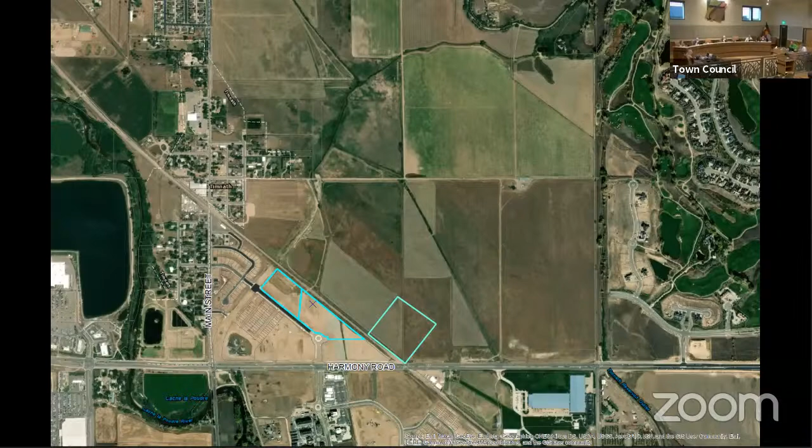The areas are currently zoned RMU and R2, and this is an amendment to their existing PD overlay. Currently they're depicted as the MUTH area, just north of the roundabout, and the R2 alley load area, just northeast of the railroad tracks.

The major changes to this area: they're requesting to reduce the lot sizes from 1,800 square feet to 1,200 square feet, reduce the lot width from 20 feet to 17 feet, reduce the lot frontage from 18 feet to 17 feet, and reduce the front yard utility easement from 14 feet to 8 feet.

The changes to the R2 alley load area would reduce the lot sizes from 5,750 square feet to 3,500 square feet, reduce the lot width from 50 to 40 feet, reduce the lot frontage from 35 feet to 30 feet, increase the maximum impervious lot coverage from 50% to 75%, and reduce the side yard setbacks from 7 to 5.

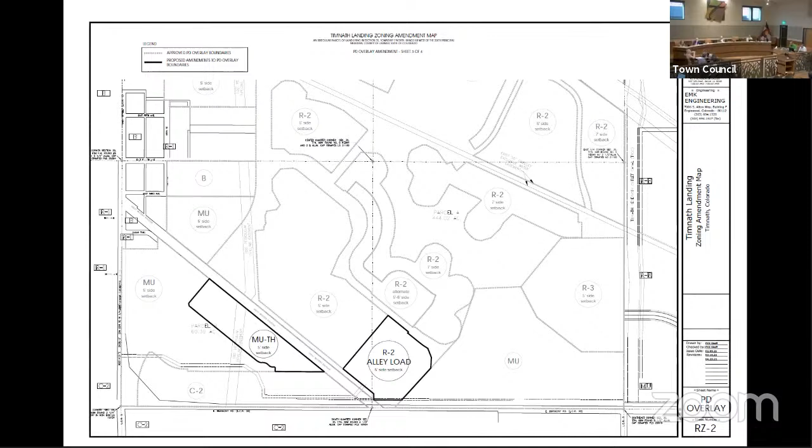These changes are being requested to provide more pedestrian-friendly development, with front porches and yards being the prominent visual from the streets while garages are in the backs of homes. These two amendments are strictly for these two areas; it does not apply to the rest of the Timnath Landing subdivision.

This is an example of the product type they would be providing, a high-level concept showing generally where the alleys would be, where some parking for garages and parallel parking would be located, and the fronts of homes fronting open space or the street directly.

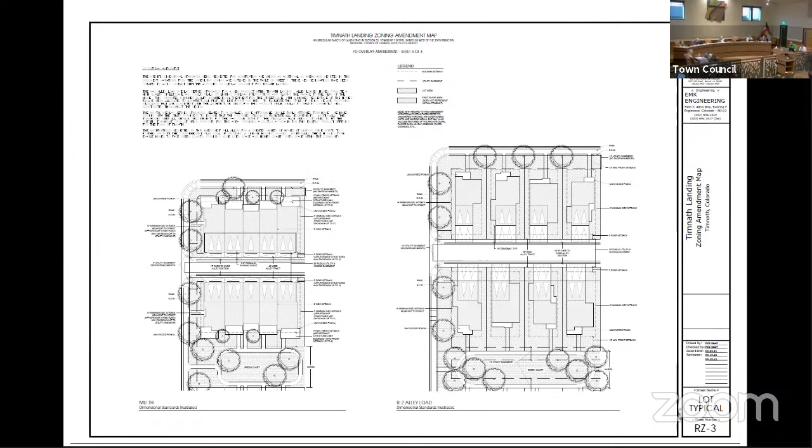Moving into the preliminary plat amendment: this map shows the overall preliminary plat amendment to create 125 single-family attached fee simple lots. The single-family attached lots will range from roughly 1,300 square feet to 3,500 square feet. These lots were reviewed against the R3 dimensional standards per the land use code for lots in the RMU zoning district, and against the amended PD overlay before you tonight.

The density for this area will be roughly 12 units per acre. This development is also providing 22% open space, park area, and trail connections. That meets what was the previous code, since this submittal was submitted prior to our recent open space amendment to the land use codes, so it was reviewed off that code, meeting the 20% open space requirement at that time, and they are providing 22% with this development.

A neighborhood meeting was held for this proposal on April 12th to gather feedback. No residents attended, since there are really no residents in Timnath Landing, so an observation report was not generated. Staff has reviewed this application in conformance with the land use code and the proposed PD overlay and finds it to be in conformance.

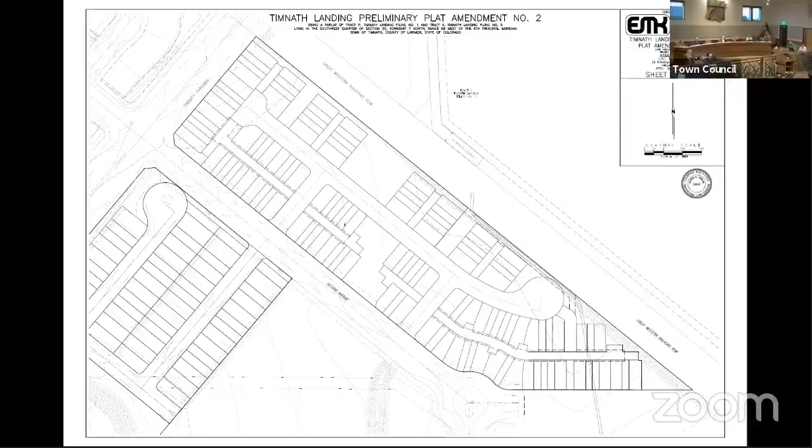First off, thanks for taking time out of your evening to hear about the Timnath Lakes PD amendment and preliminary plat, and upcoming minor subdivision as well.

John Prestwich with PCS Group, Denver, 200 Kalamath Street, Denver, Colorado, 80223. We're the land planners and landscape architects for the Timnath Lakes community.

I always want to take a quick moment to thank Kevin and staff for helping us get to where we are tonight, and also acknowledge all of our team members who have helped with the creation of this community.

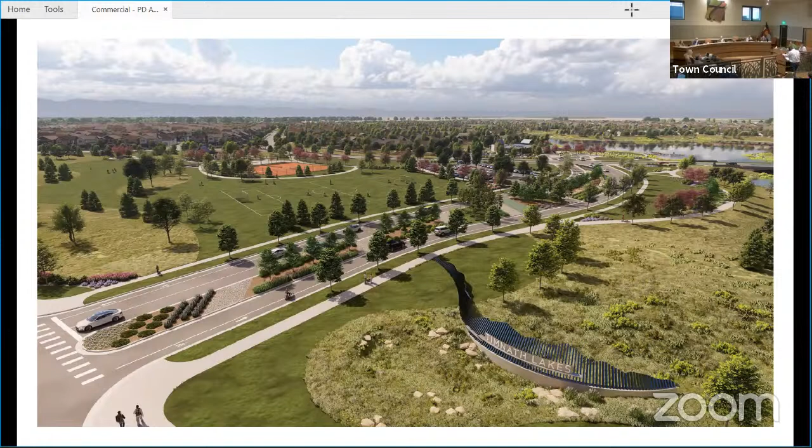So these are some of the initial renderings for the larger Timnath Lakes community. This image is taken from the air overlooking the large park area adjacent to Harmony Road. You can start to see some of the lakes in the top right, and the alley-load townhomes are actually facing this park.

Again, just some preliminary images. This is one of the lakes looking towards what we envision as the clubhouse area for the community, just north of the main park we looked at.

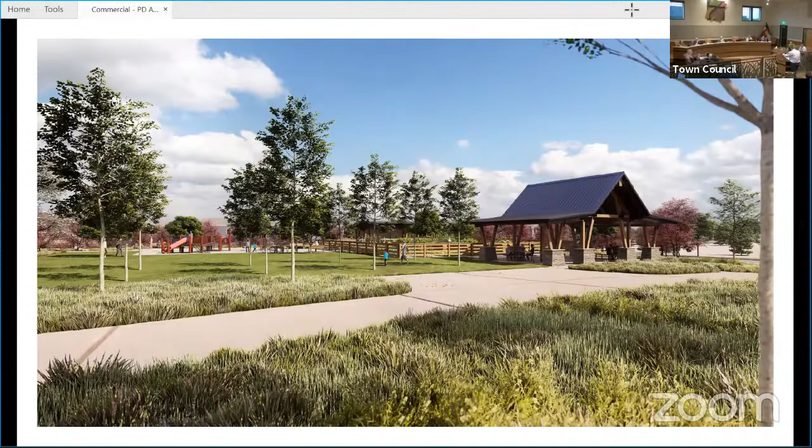This is an image of something we're calling Grove Park. This park is actually just to the north of the area we'll be reviewing this evening, the townhome area, and adjacent to the future Timnath Parkway.

Secondly, the dimensional standards being proposed to be modified are for the area adjacent to the neighborhood park. The previous plan anticipated typical front-loaded homes in that area, and now we're proposing alley-loaded homes, which we think provide a higher quality streetscape because there are no driveway interruptions along the street, and the homes generally have a higher degree of architectural interest without a large garage taking up a good chunk of the front of the house. This also addresses a previous concern we heard about having the rear of homes with privacy fences facing Harmony and the park area.

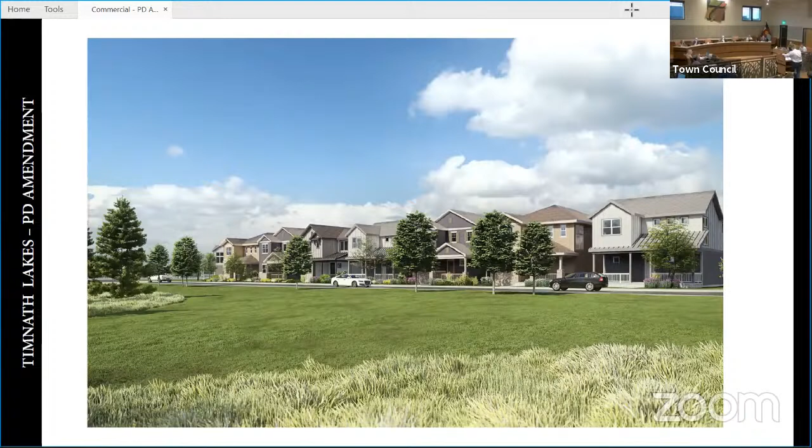This slide depicts a view of the alley-served homes looking across from the park. These are the lot typicals that show the two different home types.

On the left are the townhomes. We've depicted them in two configurations: one faces directly onto the street, shown at the top, and just below that is where they face onto a small park area, which we sometimes call a green court.

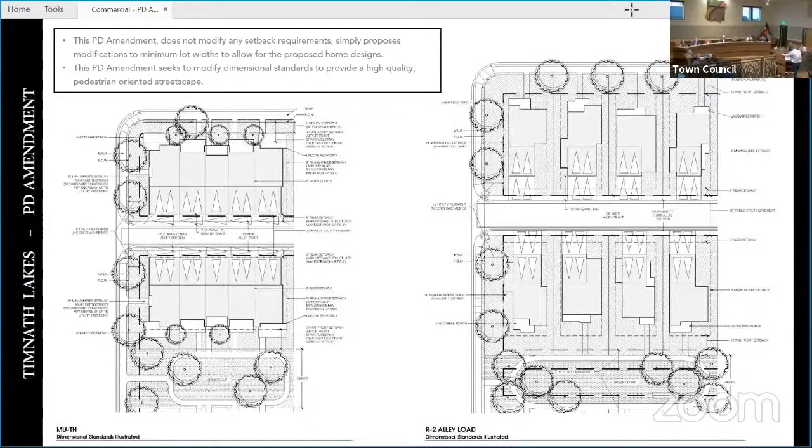We've done the same thing with the alley-served homes on the right side of this slide. The homes at the top face directly to the local street, and the ones on the bottom face towards a park area. These drawings are a little technical in nature, so we try to show you a bit more of what it's actually going to look like.

Here's an illustrative plan view of the townhome area, preliminary plat number 2. A couple of quick notes: the zoning would actually allow for multifamily uses in this zone district up to 16 dwelling units per acre, or about 168 units in this area. Our proposal is for 125 townhomes that are all alley served.

These are homes for sale, not for rent. We looked around the area and recognized there's now a fair amount of multifamily either built or proposed nearby, mostly to the south, so a slightly lower density for-sale home type in this location seemed more logical.

The proposal also allows the townhomes to face parks or green courts when they're not facing the street. So what does all of that look like?

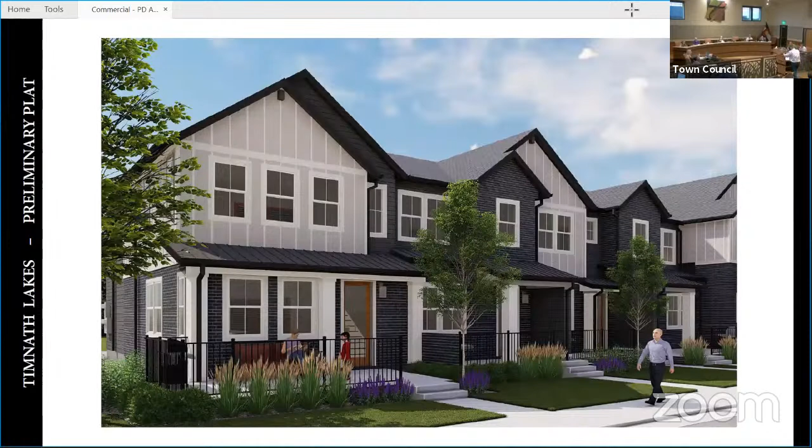This image is a view of the townhomes when they're facing directly onto a street. One important note: while there's a reduction in the utility easement that we've worked with the utility folks on, there's not an actual modification to the setbacks.

The fronts of these homes include an uncovered front porch area, front patio area, and higher quality architecture with lots of windows and undulations in the front facade, which you get an even better sense of when I go up in the air. Hopefully you can see how much variation and undulation there is in that front elevation.

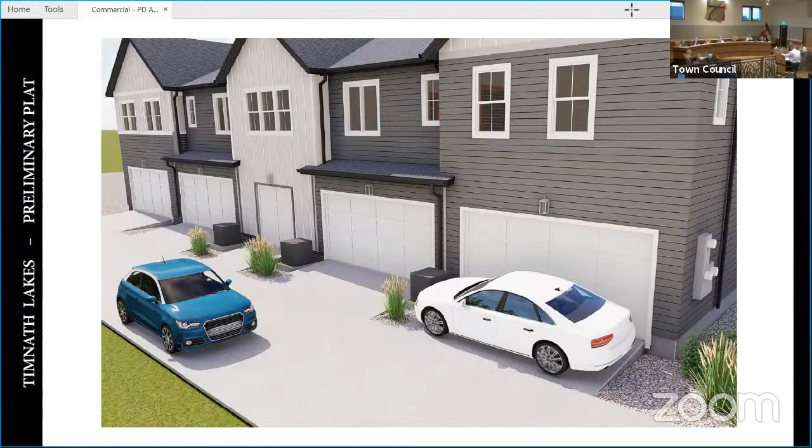One request from town staff was to see if we could accommodate parallel parking spaces along the garage in this design, and we were able to do that in this layout. We also have dedicated guest parking off of the alleys, and with no driveway interruptions, there are actually more parking spaces available along the streets in front of the homes.

To wrap up, these proposals are consistent with the approved sketch plan and have been thoroughly reviewed by town staff and the referral agencies. Staff has recommended approval, and this proposal furthers the comprehensive plan goal of providing more diversity of housing, as well as new housing opportunities and products for the town, plus an improved look from Harmony Road by not having the rear of homes face Harmony Road. Thank you for your time, we're happy to answer questions.

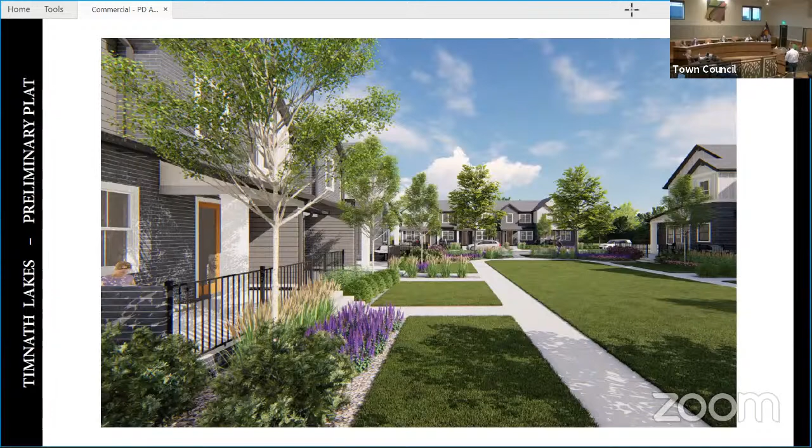Did you have a question, Brett? So regarding parking around the alley-loaded homes, we've made the alleys wide enough to where that picture you had up there was a good one. I assume the idea of making these alleys wide enough was to accommodate more vehicles and fit in the garage if you have guests or whatnot. What I am curious about is, there will still be some level of on-street parking, and it will look different compared to if you'd had a driveway neighborhood. How do you anticipate that, staff or applicant?

Kevin, could you address how that looks? You will go for it, John. Make sure that parking's not going to be a mess, essentially?

Sure. With traditional front load homes, let's say it's a 50-foot wide lot, you've got almost 20 feet of that taken up by driveway, so you can't park in front of that. The driveway is always set off at least 5 feet from the property line, so over 25 feet of your 50-foot wide lot, you can't park in front of. You can really only legitimately park one car in front of that house, which is why you have the 2-car driveway. But if we had the same scenario here, you could park 2 cars in front of that same area, same length.

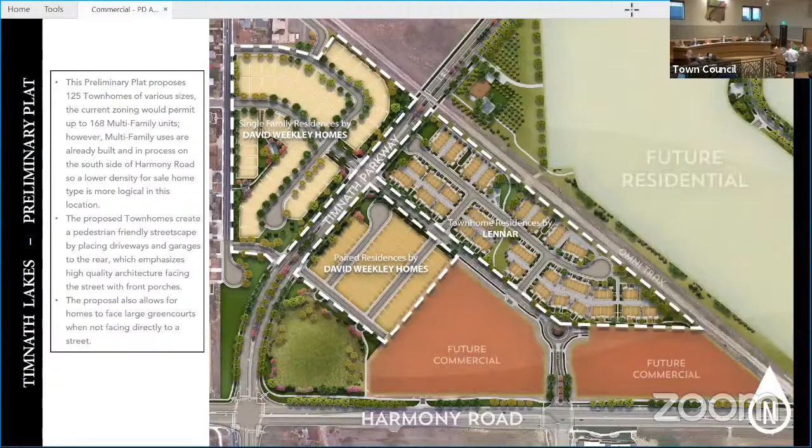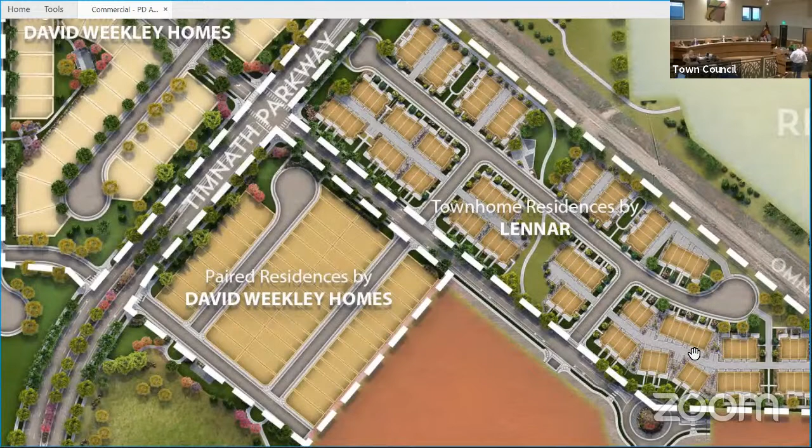I also wanted to point out that we do have parking area - it's hard to see on this map. We actually are meeting code requirements with guest parking off of the alleys, in addition to the parking behind the garage, and in addition to the parking on the street. If you see, Brett, there's pockets where I'm hovering that have guest parking separated out through the project, providing additional parking other than the driveways, plus an apron for parallel parking that would act as an additional third car parking space on the back end.

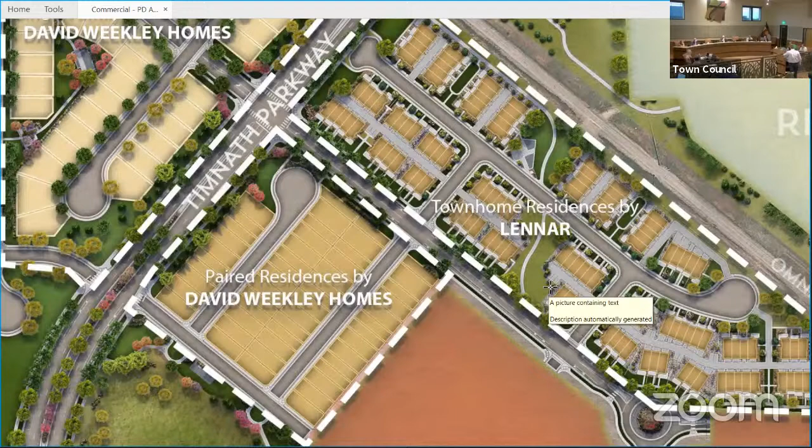I was a little concerned that you might have a couple homes decide to throw a party and then you really clog up that street in a hurry. Going back to that parking picture, my understanding is you guys have done these kinds of alley loaded homes in other areas - from a pragmatic standpoint, do you actually see cars parked like that white car does? Do we really count that as effective? You'll see it where somebody's just running groceries in and out, or it's a good friend dropping by, and you'll see it more on the end units than anywhere else because you'll typically have a connection to the front.

One question, I guess, about open space. So I understand that you were meeting the code that was originally 20%. Do you anticipate any increases between preliminary plat and final plat from the 22%, or do you feel like that's solid? In this specific area, I think that's a pretty solid number.

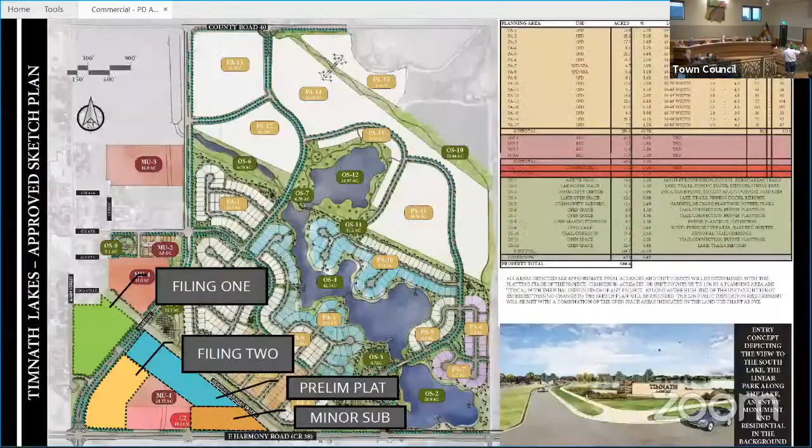But one thing I do want to point out, let's go back where you can see the overall. So if you look at the overall community, we well exceed 20%. It's when we're coming in with each little filing. We've actually started working on this for Kevin now because of some other applications we have going on. We're preparing an overall open space exhibit, and I'm going to cheat one second.

I just wanted to verify because I didn't do it and Jeff did. Would you mind speaking up just a little, or put your mouth closer to the mic? Absolutely. So just to be clear, we're preparing this open space exhibit to answer some of these questions right now.

There's sort of an area that runs diagonally through the property. That's really what we kind of think of as a demarcation line to some future phases. So analyzing this right now, we're at about 40% open space south of that line.

That's important for us because we look at it as a whole community, and while we bring in filings that are not the whole community, we look at it as the whole community. Yeah, and I agree. I think a resident doesn't care about filing boundaries either. So I think that's a relatively fair way.

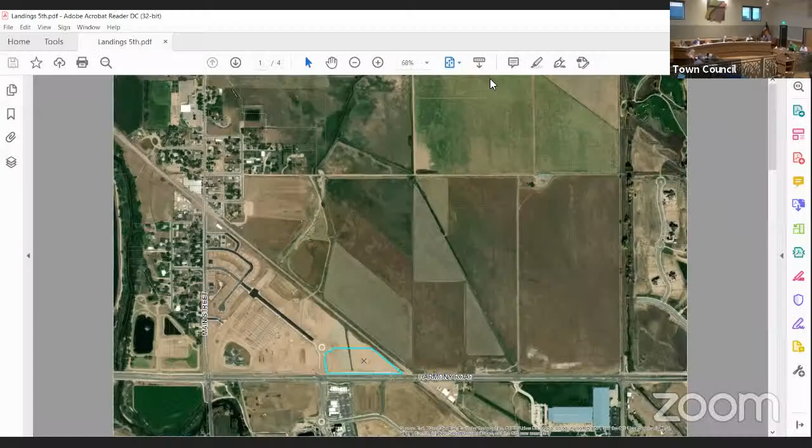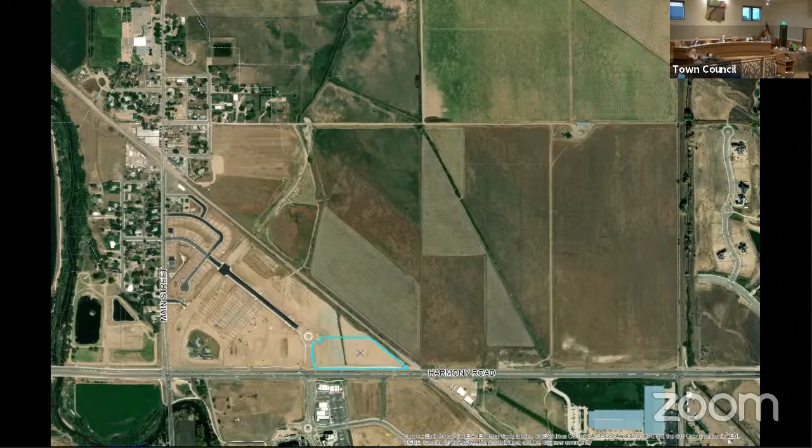Next on the agenda, resolution number 31, which is a public hearing, resolution approving Timnath Landing 5th filing, minor subdivision. Kevin: Thank you, Mayor, Council. This is a minor subdivision application for what is known as the 5th filing for the Timnath Landing subdivision. It is for 4 lots immediately north of Harmony Road and east of Signal Tree, near the southeast of that roundabout. The property is currently zoned CC Community Commercial, as highlighted there in blue.

This proposal is for 4 commercial lots and 1 tract within the roughly 6 acres tract G of the Timnath Landing first filing. Lots 1, 2, and 3 will be roughly 1.5 acres in size, while lot 4 will consist of roughly 1.3 acres. This subdivision falls within the Harmony Corridor. This is actually the first Harmony Corridor application we have, and it was reviewed off of Section 5.10 of the Land Use Code, which is our Harmony Corridor standards.

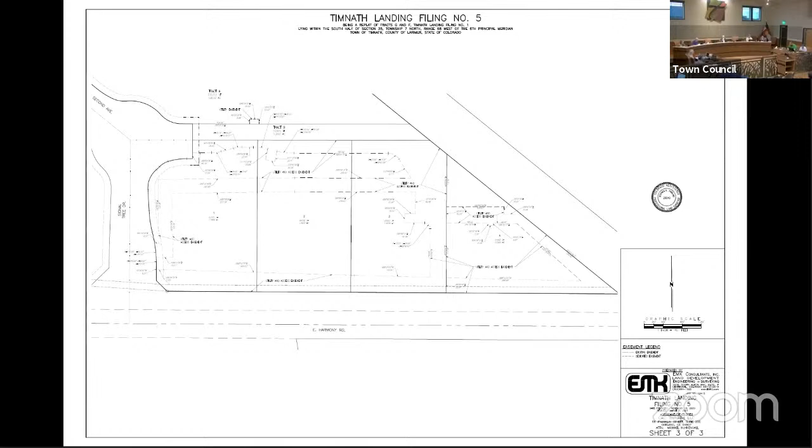This is the development structure plan for this subdivision based off of that requirement of the Harmony Corridor. Within this you can see the access, pedestrian access, and the internal vehicular and pedestrian access within these 4 commercial lots. This subdivision will actually create a new right-in access only off of Harmony Road between lots 3 and 4, which you can see here on the development structure plan. That will be new and constructed with this. It will then turn into the internal drive network for these 4 lots, which will tie into the roundabout here at Signal Tree. You can see on the dashed line, that's roughly their internal drive network.

Per section 578 of the landscape design standards of the land use code, this filing requires a minimum 25% open space. This filing is providing 20% open space, and they are meeting the required 5% open space of the Harmony Corridor standards with a plaza amenity. They have it on the north side within this subdivision. This area is their plaza public gathering node, which is a requirement. With subdivisions like this, it's a little hard to predict how these lots are going to develop out. So since they are providing 20% now with that public plaza gathering space, the remaining 5% is actually going to be added on to each individual lot, making up the remaining required open space as each site plan comes and develops, to make the full 25% requirement.

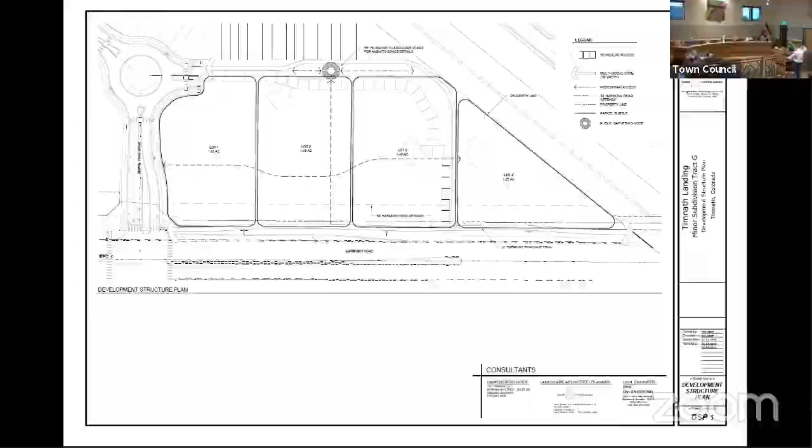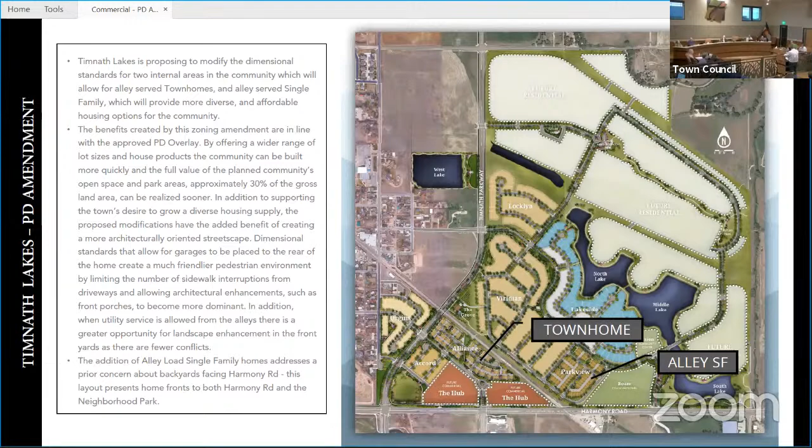Hello again, thank you. All right, so now the minor subdivision. We had this issue last time. There we go.

So again, this slide just shows the area that we're proposing to plat into these 4 future commercial lots, and then the 1 tract for open space and landscape area. The overall size is approximately 6.15 acres. The area is zoned currently community commercial. Each lot will conform to land use dimensional standards and design standards as set forth in the Timnath Land Use Code, and we've already set it up so that the area will conform to the Harmony Corridor design standards.

We don't have specific users for all of the lots at this time. That's part of the reason why we can't get into as much detail. Each one of these lots will come forward with a specific site plan. We are working with a veterinary clinic animal hospital on the very far east lot, which is part of the reason we decided to go ahead and create these 4 lots right now. It'll be very helpful for future users to understand what they can potentially build there. This process also helps us define access and how utilities will service this area for future users.

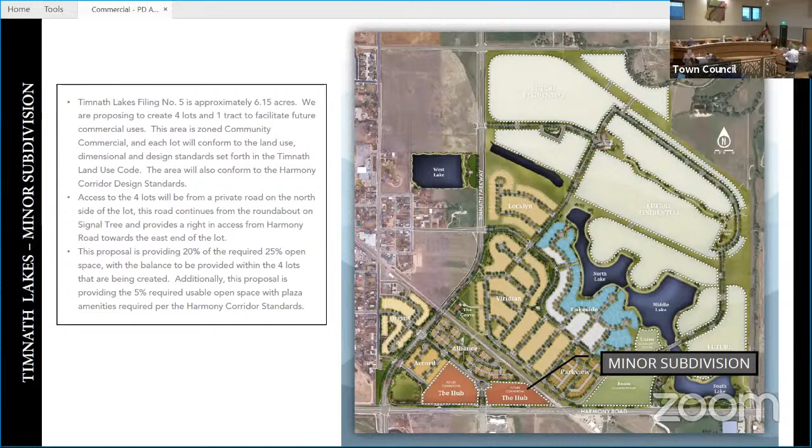That's this slide Kevin showed. It's just really the plat of the 4 lots. And then again, this is the bubble diagram of the area showing the access to those 4 lots, really coming from that private drive on the north side of the lot. And then that road continues from the roundabout on Signal Tree, providing that future right-in access from Harmony Road towards the east end of that lot.

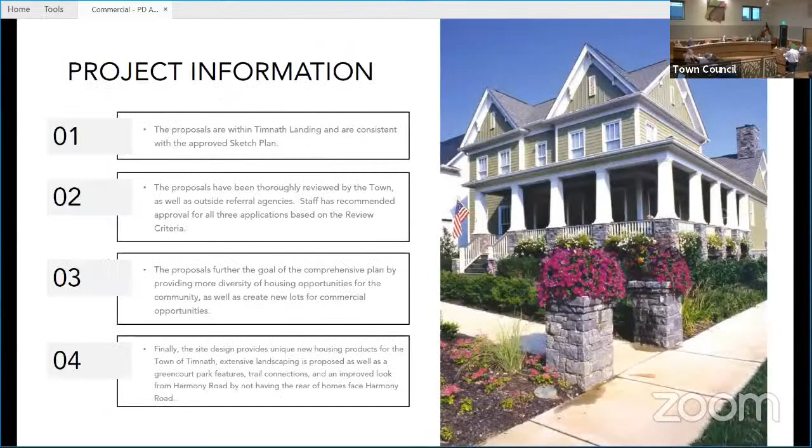There's not a ton to talk about in this, so that really wraps up our presentation on this, and we're happy to answer any questions.

Is there a deceleration lane into that right in, right out? That's part of the reason we can only have it at that one location - we're pinched by the tracks that cross there. That gives us just enough room to get the decel in the right in.

So there will be a decel lane on Harmony going into the right in, right out. Correct, and it's only a right in. Great, thanks. Does it show it on here? I can't see it really well.

Yeah, you have to zoom in. I'll zoom in a little bit there, Mayor.

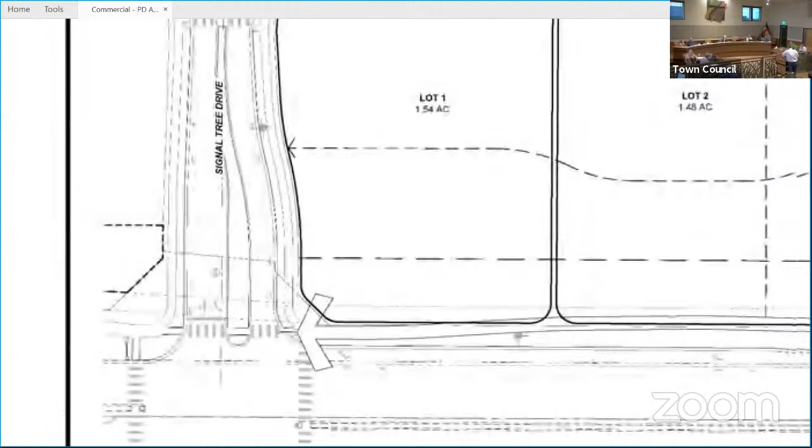So as you can see here, this is the right in being proposed. This is the taper for the decel lane, that's where my hand's kind of pointing. And where Harmony Road is the current 2-lane Harmony Road. Correct. Great, thank you.

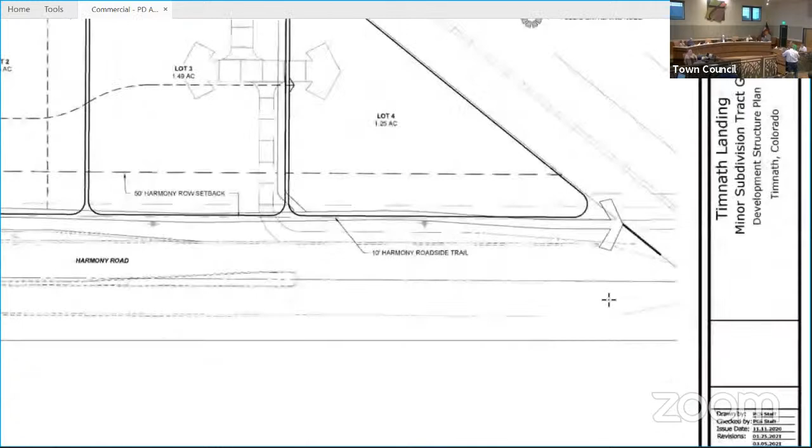Thanks, nice job. I appreciate you helping me understand that too, which makes tons of sense.

So let's see, first off, public comment. Do we have anybody for public comment on this?

Did Rick cut you off or something? Is that?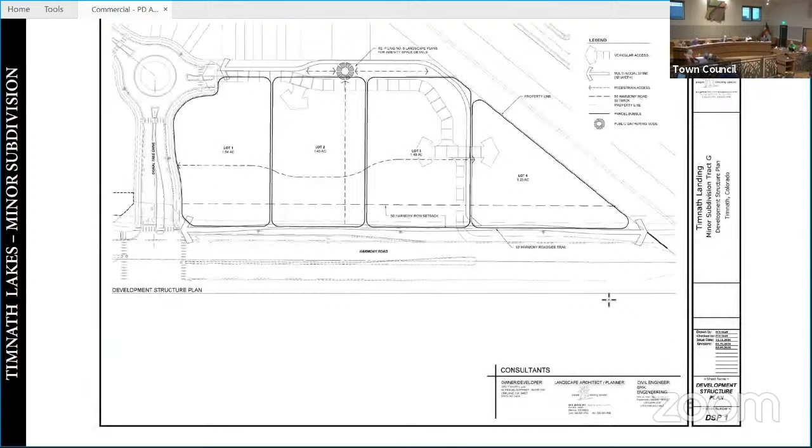Do I have a motion for resolution number 31, series 2021, a resolution approving Timnath Landing fifth filing minor subdivision? I move to recommend approval of the Timnath Landing filing number 5 minor subdivision with the following condition: 1, to allow staff to work with the owner applicant to address minor non-substantive modifications, unresolved comments prior to final signatures. Do I have a second?

Second. All those in favor say aye. Aye. Opposed? Motion carries unanimously.

Thanks for your help, guys.

Resolution number 32, series 2021, a resolution approving subdivision improvement agreement for the Fisher subdivision. Kevin, you're hogging the show tonight. I know, I apologize.

For those of you on council who are newer, this is probably a new thing for you. This is the subdivision improvement agreement for the Fisher subdivision. This basically sets up and dictates the development of the project for the actual construction of it. This is our standard form agreement. Normally Lori would be the one talking about this, but this was prior to her involvement, so this is why it's in my hands. But it's our standard agreement, nothing has changed with that. So with that, this is just the final step to get the Fisher subdivision off and under construction.